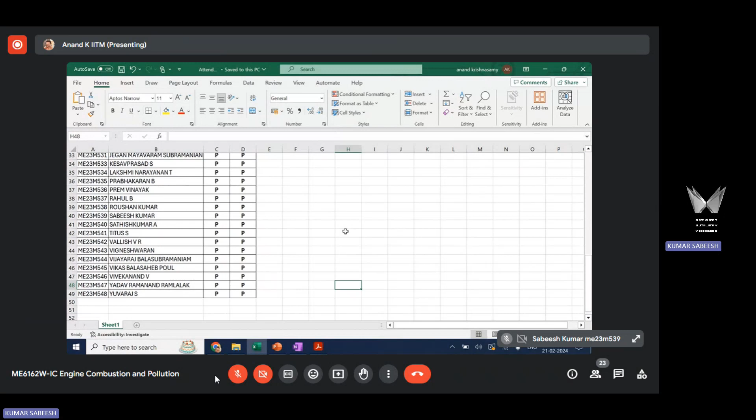Okay, thank you. So welcome back to this course, and we are in chapter 2. We have discussed the concepts in chapter 2. After discussing concepts, now we are discussing tutorial problems involving the concepts that we have discussed here in chapter 2. So in the last class, I discussed the solution procedure for the first 2 problems. There are 5 tutorial problems involving the concepts discussed in chapter 2.

You have to submit these problems. You have to solve this problem by yourself and submit it as an assignment, as already informed to you. Now, to help you proceed with the solution, I am providing you the solution procedure. Please note it down and solve the 5 problems that have already been sent to you. Submit this as an assignment by next week, next Wednesday. Is that fine?

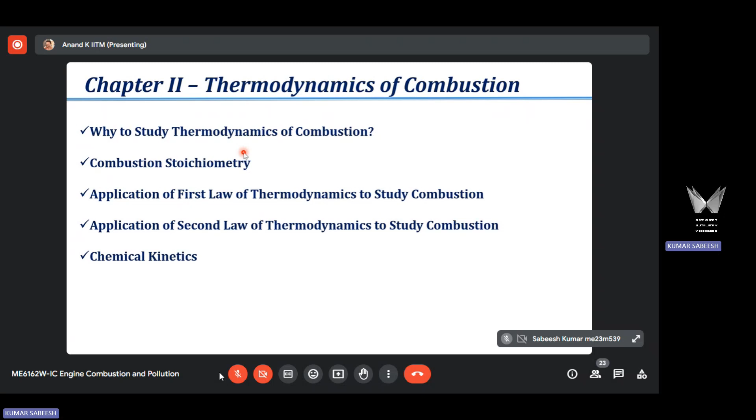As I said, there are 2 assignments for this course, and the weightage is 10% of the total marks. So solve the 5 problems and submit it, send it to my email ID. I will correct it and send it back to you.

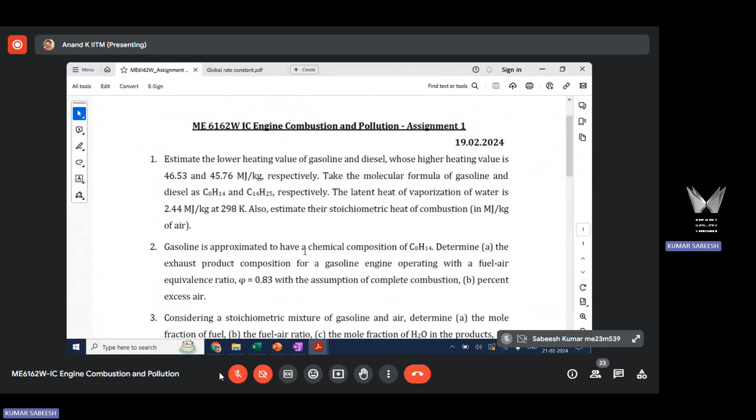So now to continue from where I stopped in the last class, I discussed the procedure for solving the first 2 problems. I am proceeding to problem number 3 now. I hope all of you are able to see the tutorial sheet. Is it visible? Yes, sir. Fine. So I'll just read out problem 3.

Considering a stoichiometric mixture of gasoline and air, determine the mole fraction of fuel, the fuel air ratio, the mole fraction of H2O in the products, and the temperature of products below which H2O starts to condense into liquid at 101.3 kilopascal. Gasoline is approximated as isooctane with the formula C8H18.

So this problem involves stoichiometric combustion of gasoline and air. Gasoline is a multi-component fuel, so we need to make some approximation to arrive at a molecular formula with the number of carbon and hydrogen atoms. Here, gasoline is approximated as isooctane with molecular formula C8H18, one of the hydrocarbons present in gasoline. We take only this one hydrocarbon as representative of the multi-component fuel. This gasoline undergoes combustion under stoichiometric condition.

You know what a stoichiometric condition is. Gasoline undergoes combustion under stoichiometric condition with air, so it's a gasoline-air stoichiometric combustion. You have to first write the stoichiometric combustion equation for gasoline with molecular formula C8H18 with air. Based on that, you have to find the 4 parameters asked in the problem.

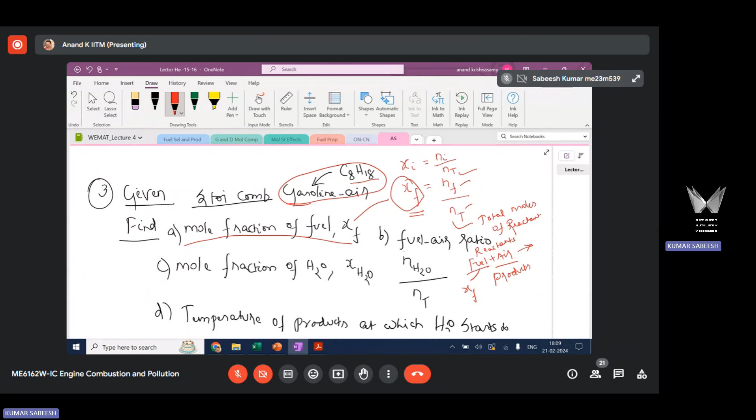The second parameter asked is fuel air ratio. How will you find fuel air ratio? That will be basically the mass of air required for burning 1 gram of fuel. Yes, so this is stoichiometric combustion. You are asked to find fuel air ratio, which refers to mass of fuel divided by mass of air. How will you find mass of fuel by mass of air under stoichiometric condition?

So we have the chemical formula for the fuel. You write the combustion equation in mole basis or mass basis? Mole basis, sir, mole basis. You always write the equation in mole basis, but now here you want mass. How will you get mass from mole? Sir, molecular weight, molecular mass.

So can I say number of moles of fuel into molecular weight of fuel? That is what is mass, right? So you know number of moles is equal to mass by molecular mass, molar mass or molecular weight. N is equal to small m by capital M.

Capital M is molecular weight of any species. So in terms of species, you can write with the subscript i: ni is equal to small mi by capital Mi, where Mi is molecular weight of species i, and small m is mass.

So here you want mass of fuel, so you are writing number of moles of fuel multiplied by molecular weight of fuel. The denominator you are writing mass of air, which will be number of moles of air multiplied by molecular weight of air. So you know all this once you write the combustion equation.

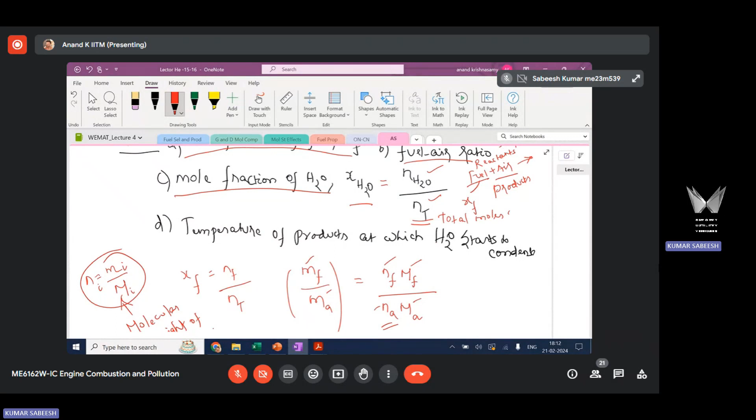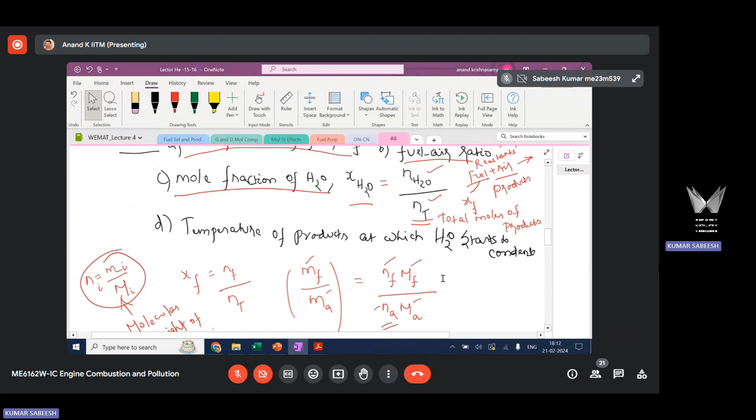Under stoichiometric combustion, what product species will you get? CO2, H2O, and N2. Three species. So products, phi is equal to 1. That is what stoichiometric combustion means.

So the products we consider will be CO2, H2O - carbon burns to CO2 under stoichiometric condition, hydrogen burns to H2O under stoichiometric condition - then nitrogen. We are not considering oxidation of nitrogen to NO and NO2, assuming the temperature is low so nitrogen comes out as it is. So you have these three species in the product under stoichiometric condition, and you consider all this to get the total mole. That is how you get mole fraction of H2O.

The last parameter: temperature of product at which H2O starts to condense. Can anyone tell me how you will find this temperature? Something related to partial pressure, sir? Yes. So from partial pressure, how will you get the temperature? What temperature do you need to consider when talking about condensation from vapor to liquid phase?

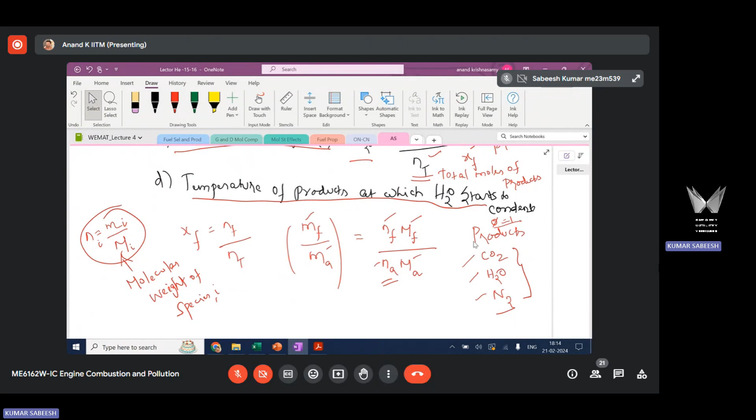So I think there is a chart for this. What is the temperature at which phase change happens? This is a basic fundamental question - what is the temperature at which phase change of any species occurs? Vapor pressure, sir. No, I'm not asking that. Boiling point? Yes, boiling point, or saturation temperature, can I say?

Yes, of course sir. So you would have studied this temperature enthalpy diagram, right? You will have a constant pressure line, something like this - pressure is constant here. And at this temperature, phase change is happening. What is this temperature called? Saturation temperature. So for each pressure, there is an associated saturation temperature. This is liquid phase, this is vapor phase. Here, phase change starts to happen at this temperature, which is called saturation temperature.

Once the H2O vapor reaches this saturation temperature at this pressure, there will be conversion from vapor phase to liquid phase. This is what is asked in the problem. Now I need to get the saturation temperature, and to get the saturation temperature, I need to know the pressure. What pressure do I need to consider here?

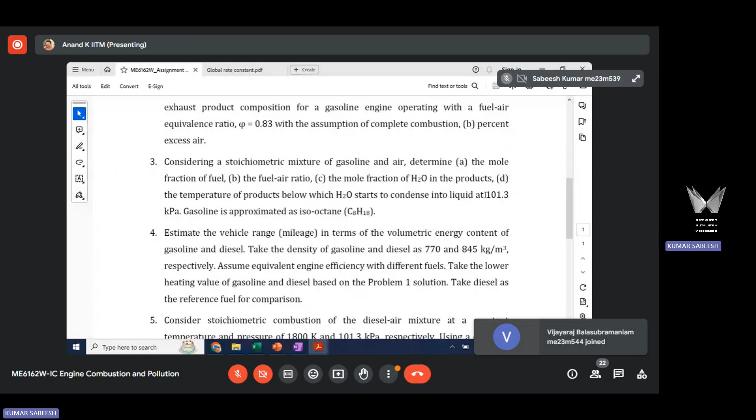Partial pressure, sir - partial pressure of H2O. Very good. What is given in the problem? What information with respect to pressure is given in the problem? 101.3. 101.3 kilopascal - what is this pressure? This is total pressure, right?

101.3 is the total pressure. Did you get what I am saying? Yes sir. But what you need for saturation temperature is the partial pressure of H2O. You have a gas mixture - we just said there are three species in the product: CO2, H2O, and N2. Each of these species will exert some pressure - that pressure is partial pressure. So H2O will have some partial pressure, CO2 will have some partial pressure, and N2 will have some partial pressure.

There is a total pressure, right? But what we need to consider is the partial pressure of that particular species. From this, you need to get the saturation temperature. Now, how will you get partial pressure from the total pressure? Total pressure multiplied by mole fraction of H2O. So partial pressure of H2O equals mole fraction of H2O multiplied by total pressure. What is this law called? Dalton's law.

Pi is equal to Xi into P, this is a generic notation. P is total pressure, Pi is partial pressure of species i. Partial pressure of any species i is equal to mole fraction of that species multiplied by total pressure. This is Dalton's law that we are applying here.

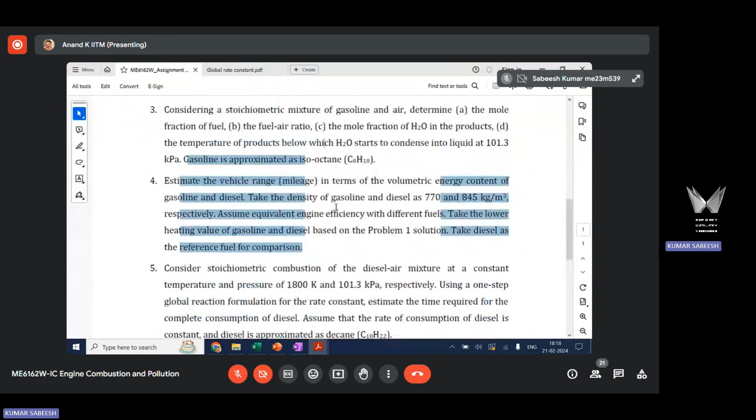Okay, so next problem, problem number 4: estimate the vehicle range or mileage in terms of volumetric energy content of gasoline and diesel. Take density of gasoline and diesel as 770 and 845 kilogram per meter cube respectively. Assume equivalent engine efficiency with different fuel. Take the lower heating value of gasoline and diesel based on problem 1 solution. Take diesel as a reference fuel for comparison. Have you understood the problem?

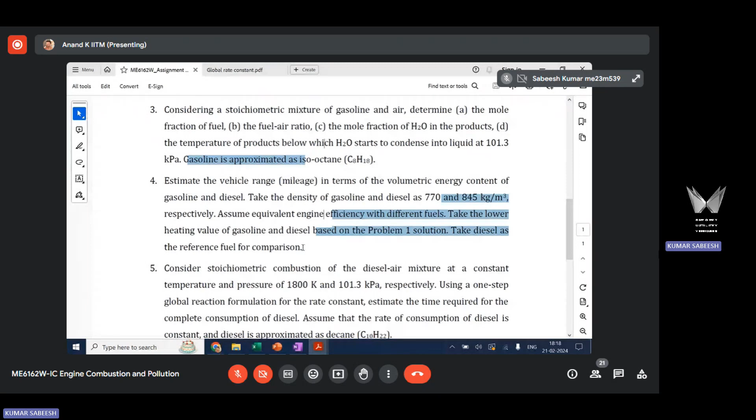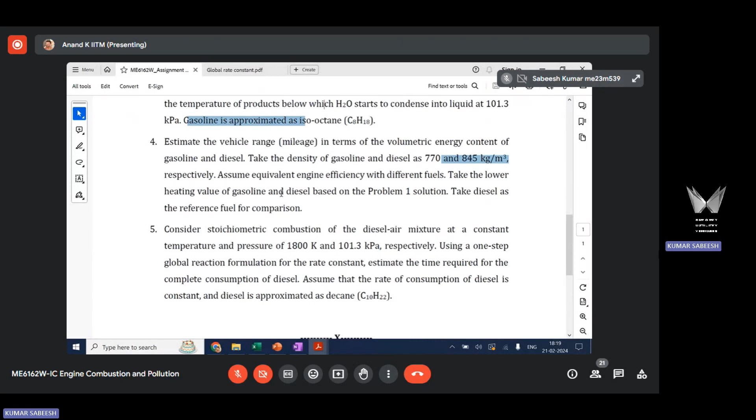Is the problem statement clear to you? You are asked to find the vehicle range. There are two vehicles here: one is fueled by gasoline, which is an SI engine; the second one is fueled by diesel, which is a CI engine. You are asked to compare the mileage given by these two vehicles, one with an SI engine, the other with a CI engine. You have to compare the mileage, right?

What assumption are you considering here? The engine efficiency is the same for both engines with different fuels. So when you assume engine efficiency is the same, what will determine the vehicle range or mileage? The calorific value of the fuel, the heating value, LHV. Anything else other than heating value? And density also, sir.

So when you consider heating value and density together, you get something called volumetric energy content. What is volumetric energy content? It is how much thermal energy is released by burning unit volume of the fuel. We store fuel on a volume basis in our vehicle.

Now, based on the differences in the density of gasoline and diesel, and based on the differences in the lower heating value of gasoline and diesel, the vehicle range or mileage is going to be different. You are asked to find that. We are assuming equivalent engine efficiency, so the difference in vehicle mileage is only due to the difference in the volumetric energy content of the fuel. So you have to find the difference in volumetric energy content of gasoline and diesel.

Consider diesel as a reference fuel. First, find the difference in volumetric energy content, then consider diesel as the reference fuel. With that, you have to express the difference in mileage in terms of percentage. You cannot get the absolute mileage value; you are going to get the difference in mileage in terms of percentage.

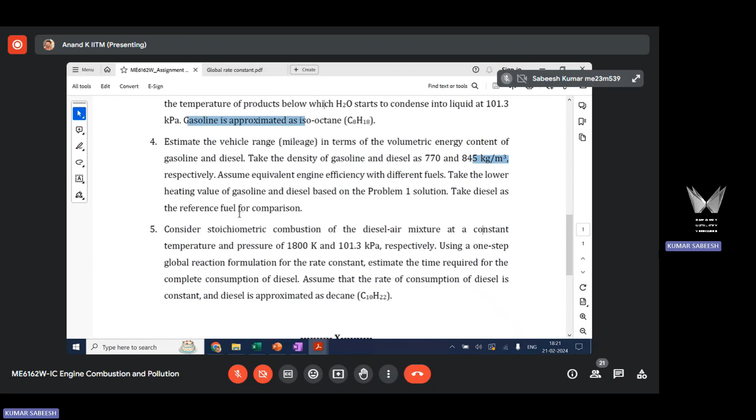You have to first find the volumetric energy content, considering equivalent engine efficiency. To find volumetric energy content, you need density and lower heating value information, for gasoline first, then for diesel you also have density and lower heating value. Find the volumetric energy content based on the density and lower heating value.

Find the difference in the volumetric energy content of gasoline compared to diesel, and then divide that value by diesel volumetric energy content. You will get the difference in volumetric energy content in terms of percentage, which is nothing but the difference in mileage. Difference in mileage equals the difference in volumetric energy content of the two fuels. You may get a negative or positive value. If you get a negative value, it means the gasoline vehicle is providing less mileage. Clear?

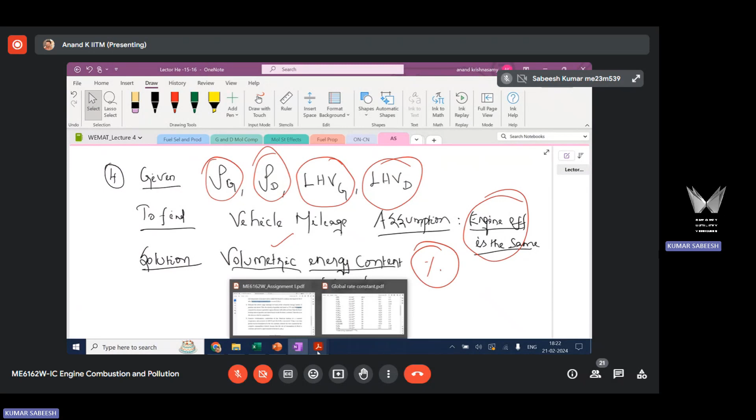The last problem, number 5. Consider stoichiometric combustion of a diesel-air mixture at a constant temperature and pressure of 1800 Kelvin and 101.3 kilopascal respectively, using a one-step global reaction formulation for the rate constant. Estimate the time required for complete consumption of diesel. Assume that the rate of consumption of diesel is constant, and diesel is approximated as decane, C10H22.

So in this problem, we are approximating diesel fuel as a single hydrocarbon, decane, with molecular formula C10H22. The problem involves stoichiometric combustion of this diesel-air mixture. During this combustion event, the mean values of temperature and pressure are given as 1800 Kelvin and 101.3 kilopascal — that is, the average value of temperature and pressure during the combustion event.

Using one-step global reaction formulation, we already discussed how to calculate reaction rate for an elementary reaction as well as for a global one-step reaction. You have to apply this global single-step reaction formulation because we are approximating this multi-component fuel diesel as one-component fuel decane, considering only one hydrocarbon. Now we have to apply the global single-step formulation, which is the simplest description of a chemical kinetic scheme, as discussed previously.

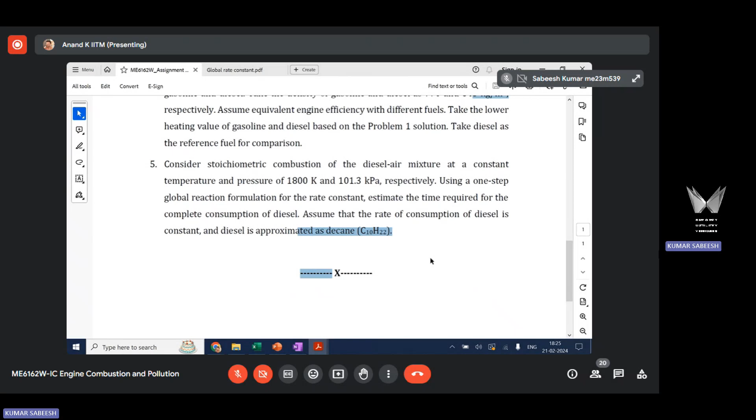The rate of consumption of diesel may vary to some extent in an actual combustion, but here we assume it is constant. With that assumption, you have to find how much time is required to completely consume the diesel fuel. You are taking a finite volume of diesel fuel, and you have to find how much time is required for the complete consumption of that finite volume. This is what is asked in the problem.

So you are considering diesel-air stoichiometric combustion, with diesel approximated as C10H22. Pressure and temperature are given, and you are asked to consider the one-step global reaction formulation. The data you need to find is time, small t, the time required for consumption of diesel. How will you find the time? Can you think of anything based on the global single-step formulation? Can you think of the solution procedure to get the time?

So this is time. What we discussed earlier is the rate of consumption of fuel, given by minus Q dot R. This negative sign indicates consumption of fuel. Q dot R is nothing but the rate of progress of a reaction. In this case, it's a single-step global reaction, and the rate of progress of the reaction is given by Q dot R.

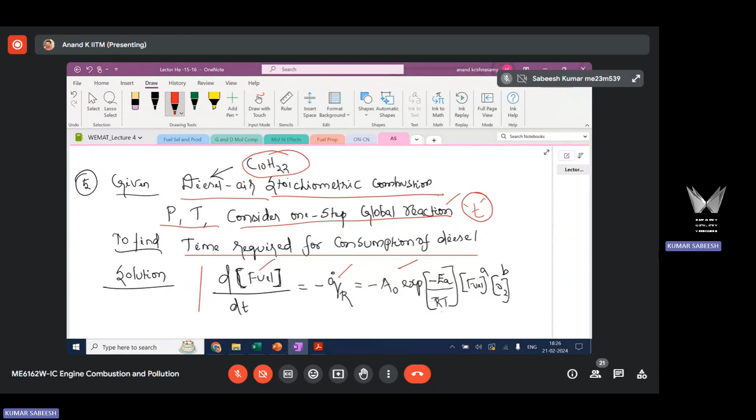You know Q dot R can be estimated using the equation: A naught, exponential of minus EA by R bar T. This whole thing is called the rate constant K. K is multiplied by fuel concentration raised to the power small a, and oxygen concentration raised to the power small b. This is called the law of mass action — how a chemical reaction proceeds. So the first term is the Arrhenius rate constant K, multiplied by fuel concentration raised to power A and oxygen concentration raised to power B.

This is what we discuss when we discuss the global single step reaction formulation. This is a model that helps you get an estimate of rate of consumption of fuel. But what is asked in the problem is time required for consumption of diesel. Once you know the rate of consumption of diesel, how can you find the time required for consumption of diesel?

You get the rate of consumption here, and from this you can find time. So what should you do? Basically, you get mass of the fuel and then divide by rate, so we'll get time. No, you need time. Here you are getting the rate of consumption.

Rate of consumption, since the chemical equation is expressed in molar basis, when you say d upon dt of fuel, the unit will be mole per cc second. Mole per cc is for concentration, anything within the square bracket is called concentration, as I already told you. So mole per cc second is d upon dt of fuel concentration, with denominator in time, that is seconds.

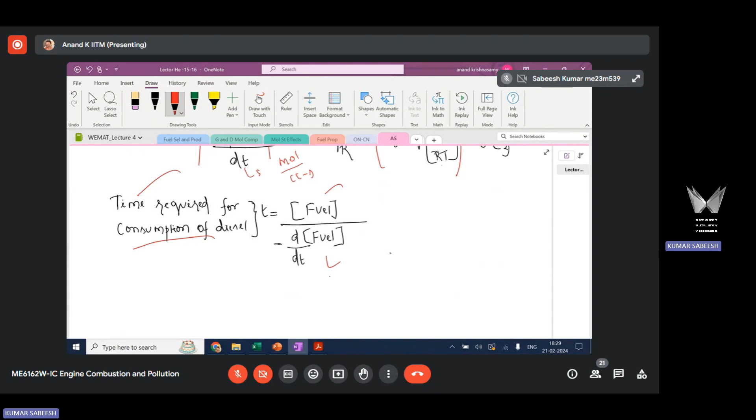I have introduced a negative sign because time cannot be negative. D upon dt of fuel is written with a negative sign just to indicate that it's a consumption. So this will be mole per cc, and this will be mole per cc second. Once you divide these two, you get time in seconds, which is what you want. So you have to get the concentration of fuel and the d upon dt of fuel - first use this equation to get mole per cc second, also find concentration of fuel in mole per cc. From these two, you will get the time required for consumption of diesel.

Now, one important thing you need to look at is the units of the parameters, so pay careful attention to units of all parameters. I have also circulated a table to you which will be used to solve the problem. In this table, what is given is global reaction rate constants - whatever we have discussed now, those constants are given for important hydrocarbons.

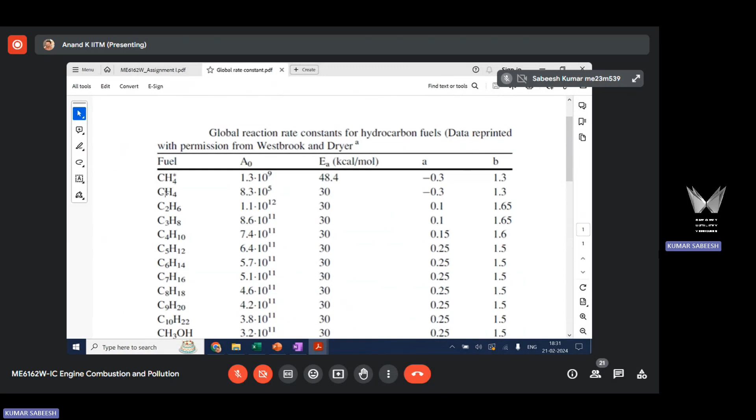On the left hand side you could see several hydrocarbons: CH4, C2H6, C3H8, and so on. For these different hydrocarbons, the values provided are A0, the pre-exponential factor, EA the activation energy, then small a, and B. I already told you these values - A0, EA, small a and b - are based on experiments done in shock tubes or flow reactors. This research group has done experiments in shock tubes and flow reactors and arrived at these values for the hydrocarbons listed on the left side of the table.

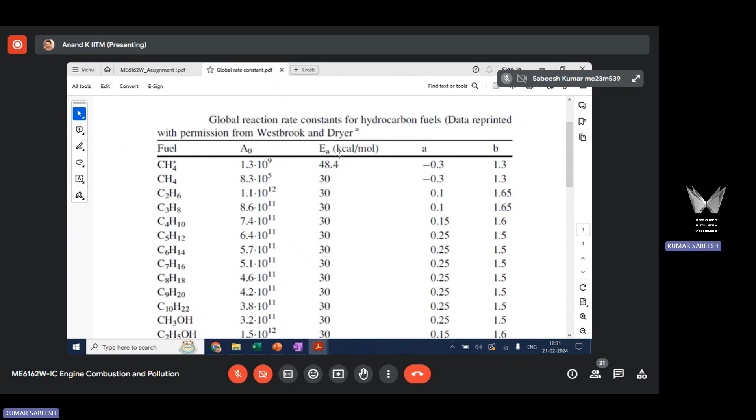Only thing you have to be careful about when you use this data is that it is given in a particular unit. For example, activation energy is given in kilocalorie per mole, which is not a standard SI unit.

A0 is given in mole per cubic centimeter raised to the power 1 minus a minus b, per second, which is again not a standard SI unit. These are the units used based on the experiments done. So in order to solve the problem using this information from the table, you have to pay attention to the units.

Because you need to see that the units you are substituting are consistent. For example, what is the unit for R bar? R bar is the universal gas constant, which is Joule per mole per Kelvin. If I write the value, it is 8.314, and you can write it as joule per mole Kelvin, or kilojoule per kilomole Kelvin.

What is the unit for temperature? Temperature is Kelvin. So once you multiply R bar and T, what will be the final unit? Kelvin will get cancelled, and you will get kilojoule per kilomole.

Now, in the table, what is the unit given for EA? The unit is kilocalorie per mole. So here, suppose I substitute in kilocalorie per mole, this is what I get from the table. Then the units are not balanced: the numerator has kilocalorie per mole, the denominator has kilojoule per kilomole. So what should you do?

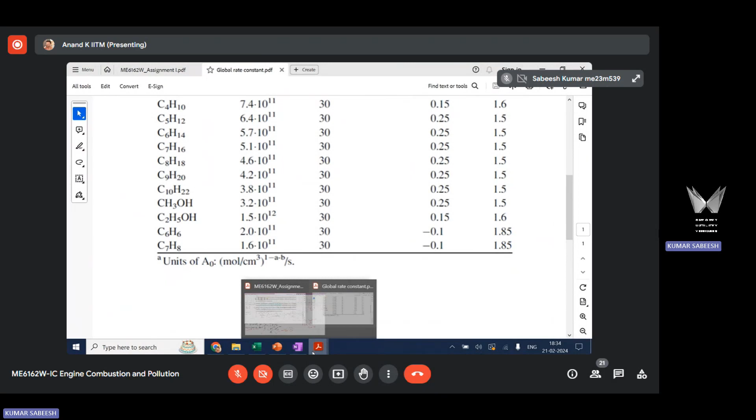A0 is given in mole. Looking back at the table, at the footnote, the unit of A0 is mole per cc, that is centimeter cube, raised to the power 1 minus a minus b, divided by second. This is the unit they have given.

So mole per cc raised to the power 1 minus a minus b divided by second. It means you have to get the fuel concentration in mole per cc, so that you get mole per cc to the power A, and the oxygen concentration in mole per cc, so that you get mole per cc to the power B. That is what you have for A0, and this A and B will cancel out. Finally you will get this in Q dot R in mole per cc second, which is what you have written here for d by dt of fuel concentration, equal to minus Q dot R.

So it means Q dot R unit is mole per cc second, because of the unit for A0, which is mole per cc raised to the power 1 minus a minus b by second. So you have to get the fuel and oxygen concentration in this mole per cc unit. Fuel concentration and oxygen concentration, how will you find them?

How will you find the concentration? PV is equal to nRT, sir — you have to apply the equation of state. PV equal to N R bar T. For species i, let us say it is Pi V equal to Ni R bar T. So it means Pi is equal to Ni by V, R bar T.

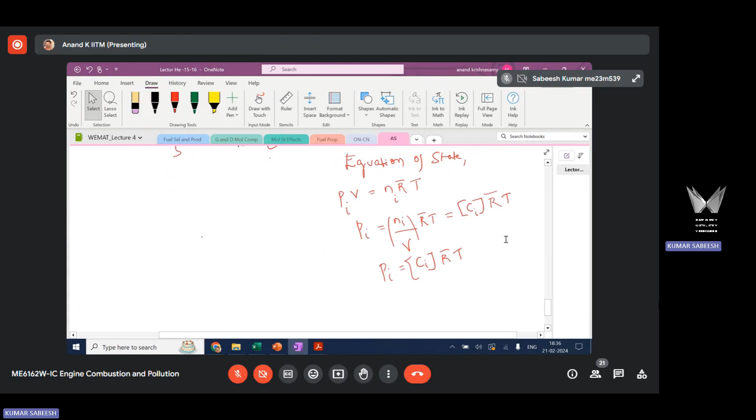Ni by V is nothing but the concentration of the species, indicated with a square bracket. So Pi equals concentration of i times R bar T. What I have to find is concentration, so this is Pi by R bar T.

Pi can be expressed in terms of total pressure. So what will be the equation? Xi P divided by R bar T. This is the equation you are going to use to get the concentration of any species. This is standard notation, written within a bracket, and it is obtained from the equation of state and Dalton's law. Concentration of any species is Xi P by R bar T.

Now, if you look carefully, if you use standard SI units, what will be the unit for pressure? Mole fraction has no unit, so that doesn't contribute any unit. Pressure, say you substitute in kilopascal, temperature in Kelvin, R bar is the universal gas constant, again kilojoule per kilomole Kelvin. The Kelvin will get cancelled, so for R bar, in the denominator term, you finally get the kilojoule per kilomole unit.

Numerator term Xi has no unit, while P, pressure, has kilopascal unit. So with kilopascal and kilojoule per kilomole, if you simplify, concentration you will get in standard SI unit, that is kilomole per meter cube. Based on the standard units you substitute for the parameters on the right hand side, you will get concentration in kilomole per meter cube. But in the rate equation, you have to get mole per centimeter cube. So what you get based on standard SI unit is kilomole per meter cube, and you have to convert this into mole per centimeter cube. This is what you do before you substitute fuel concentration in the rate equation, the Q dot R equation.

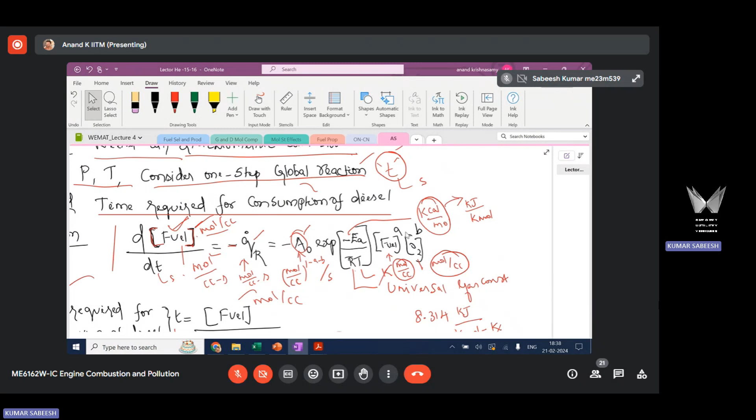Similarly, you do it for oxygen. Clear? Yes sir, so that is how you have to pay attention to the unit, otherwise you will end up getting a wrong value. There are several parameters with different units, so pay attention to the unit and see that they are consistent according to the given information. With this, you should be able to solve and get the value of the time required for the consumption of diesel. You are going to get it from the fuel concentration and rate of consumption of fuel, that is d upon dt of fuel.

So that is how you are going to proceed and get the solution for problem 5. With this, chapter 2 is over. We are now moving to chapter 3.

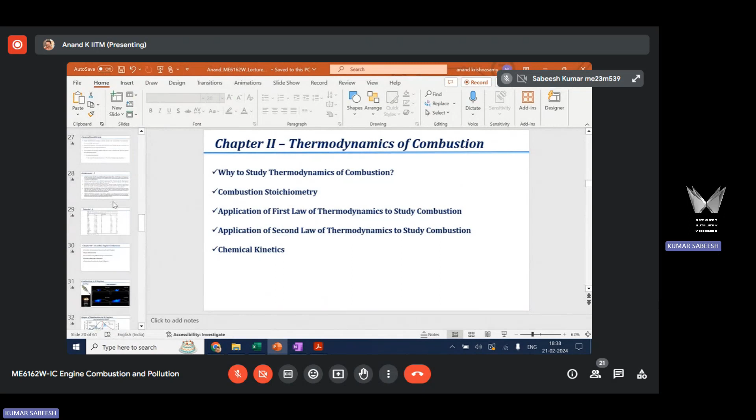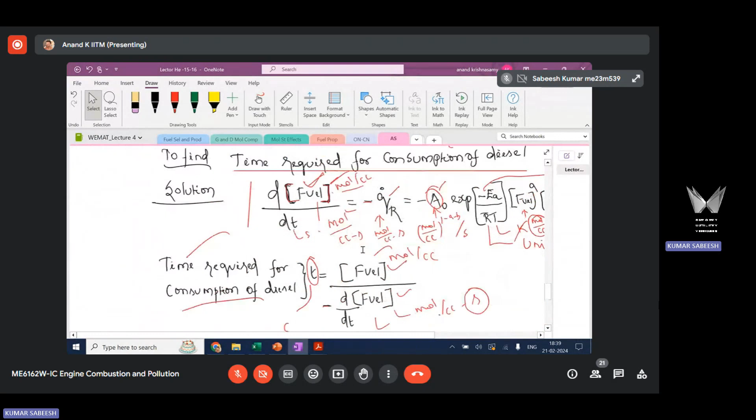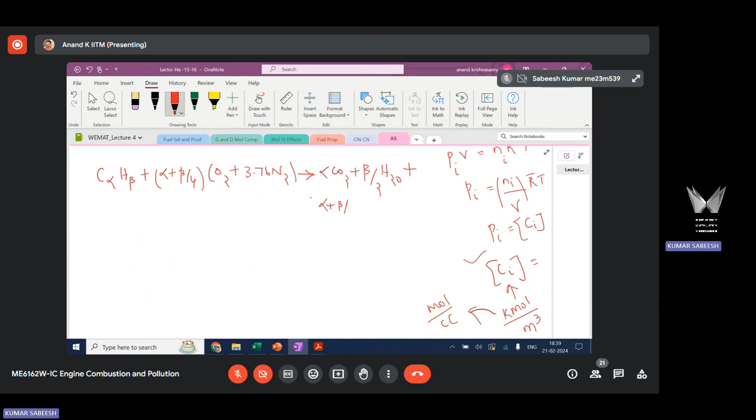Professor, one question I want to ask. Can I ask, sir, if you allow? Sir, regarding the stoichiometric equation that we have learned through your notes, like C alpha plus H beta plus alpha plus beta by 4, O2 plus 3.76 N2 — this is the fuel plus air equation, what I mean to say. Yes. Now, while calculating the mole of air, what we discussed is alpha plus beta by 4 into 3 into 4.76, right sir? Yes. Sir, I just want to ask one thing: O2 plus 3.76 N2 is basically the chemical composition of air, right sir? Yes. So why are we, like, 1 mole of oxygen will contain 3.76 mole of nitrogen, why are we again multiplying it by 4.76? I'm sorry, it's a stupid question, but still I was thinking. So this is the equation you are talking about, right? I'll just complete it, N2.

This is the stoichiometric combustion equation, right, for any hydrocarbon. So what is your question here? My question is, O2 plus 3.76 N2 is the complete equation for air, right sir? Yeah, this is the chemical representation of air. Yes, this is air, right sir. So if I get alpha plus beta by 4, that is the mole of air present in this equation, why am I multiplying it with 4.76? I could understand it because 1 mole of oxygen requires 3.76 mole of nitrogen, and hence we are multiplying it, but is that right sir? What I mean to say is, why your question is why am I multiplying this with 1, 3, 1 plus 3.76, which is 4.76. So what you are doing is alpha plus beta by 4 multiplied by 4.76, every time using this to indicate the air mole. Right, your question is why I have to multiply it by 4.76 — I could be done with alpha plus beta by 4 alone. Exactly, precisely sir, that is the question.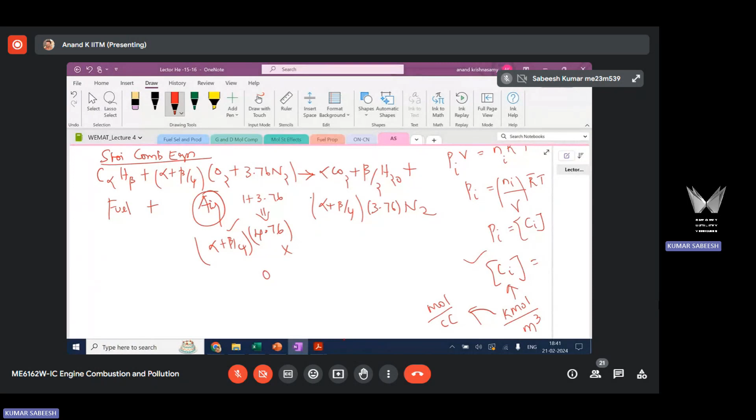Not this, right? You can do that when you combust with oxygen. When you have a hydrocarbon-oxygen combustion, it will be only alpha plus beta by 4. But what you are doing is hydrocarbon-air combustion. In hydrocarbon-air, the stoichiometric equation is written for 1 mole of oxygen multiplied by so many moles. But each mole of oxygen is accompanied with 3.76 mole of nitrogen in air. So in air, you know how you get this number 3.76 — that is because air is 79% nitrogen, only 21% oxygen. Since you use air for combustion, you have to multiply it by 4.76, because each mole of oxygen is accompanied with 3.76 moles of nitrogen. So when you talk about air mole, it is 1 mole of oxygen plus 3.76 mole of nitrogen, total 4.76 moles. So when you talk about air moles, you have to consider 4.76 multiplied by alpha plus beta by 4. Alpha plus beta by 4 is based on the fuel, but for air, you always have 1 plus 3.76. If it is oxygen alone, it's only 1.

Thank you, sir. So this is air combustion, hydrocarbon air combustion. This coefficient is always multiplied with 4.76 because for oxygen, it is alpha plus beta by 4, but for nitrogen, it's 3.76 multiplied by alpha plus beta by 4. Understood, sir. Thank you so much.

Are there any other questions?

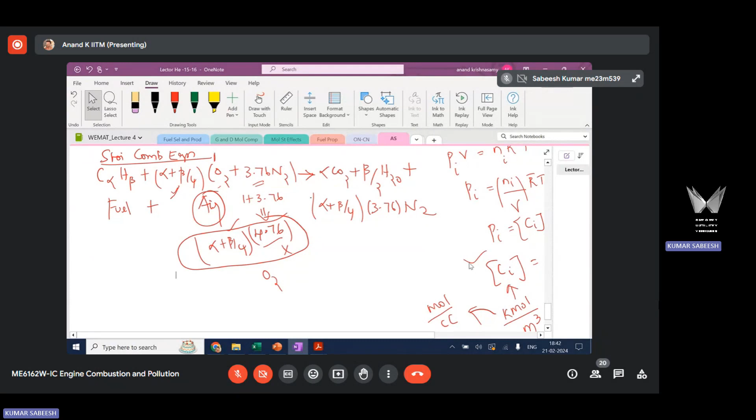Okay, so now let us move on to chapter number 3, which is about the actual combustion event in SI and CI engines. These are the contents we will discuss in this chapter. I will start with SI engine combustion and then move on to CI engine combustion, following the same sequence of contents for both.

So I will first provide an overview of the combustion process in SI engine, how the combustion event happens, and then discuss the stages of SI engine combustion. Here we characterize the combustion event through different stages, since SI engine combustion happens in different stages.

Why do we have to characterize the combustion event? The idea is that once you characterize it in terms of different stages, you can bring out the various factors affecting each stage. These factors are variables, which can be engine design based or engine operating condition based, and they help you control different stages of combustion.

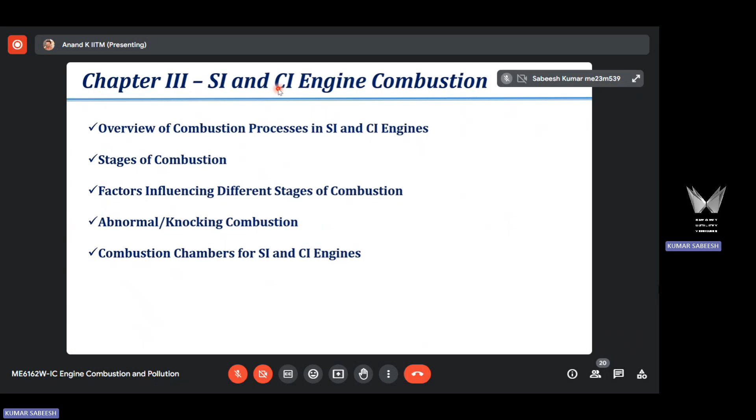Sir, one question regarding this octane number measurement procedure. For cetane number, we have a criteria that we'll be varying the compression ratio until we have a certain degree of ignition delay. For octane number, is there any such thing for SI engine?

For SI engine, what I said is we are going to vary the compression ratio until the engine knocks. So we are going to measure the knock. Basically, in the CFR engine, we allow it to knock when doing the measurement of octane number or cetane number. In SI engine, the SI version of a CFR engine, we vary the compression ratio until the engine knocks.

And how do you characterize knock? By using a knock meter, you can measure the knock intensity. Until the engine knocks with the standard knock intensity, you vary the compression ratio - that is a reference point. Like in a CI engine, you set 13-degree ignition delay time as a reference, in SI engine the reference is knock with a standard intensity.

Okay, sir. Thank you. Fine.

Okay, I'll stop here. I will see you on Monday. Thank you. Thank you so much, sir. Yeah, yeah, thanks a lot, sir. Thank you. Thank you. Bye. Thank you, sir. Yeah, thank you.